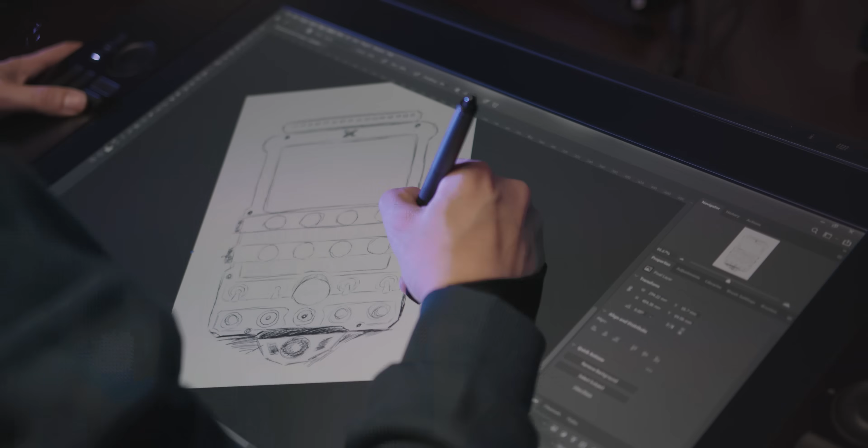In this project, I will show you how this button box went from quick sketch on paper to something real that actually can be used for simulation. The idea was simple, you only use what you need. Everything connects with a magnet, so different modules can be added or removed easily.

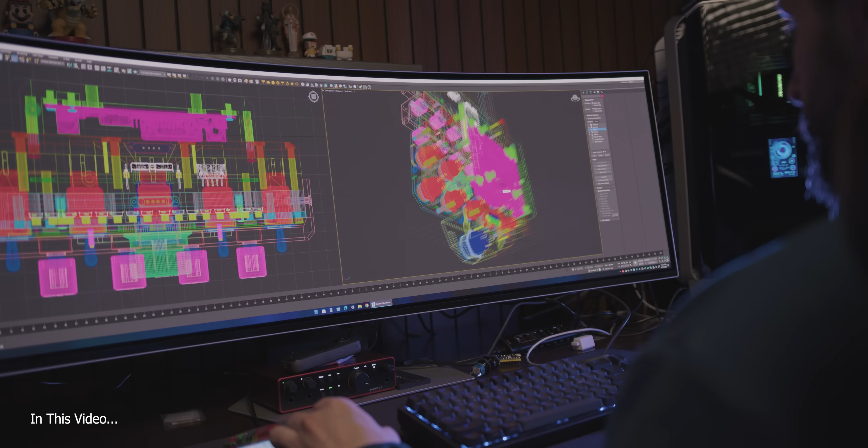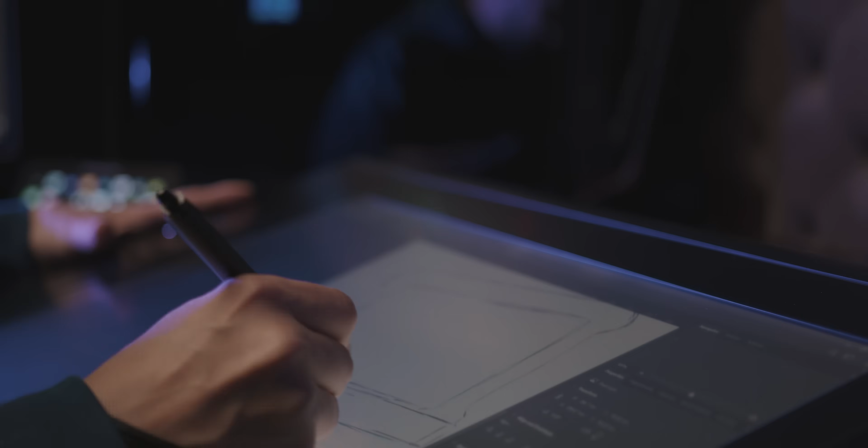I came across this upcoming button box by accident, and it instantly gave me an idea, why not create my own with my own vision. So I opened Photoshop and started drawing, letting the shapes come naturally without overthinking it too much. At this stage, it's really about defining the overall look and getting a real feel of how everything fits together. It's also much easier to make changes here compared to working directly in 3D.

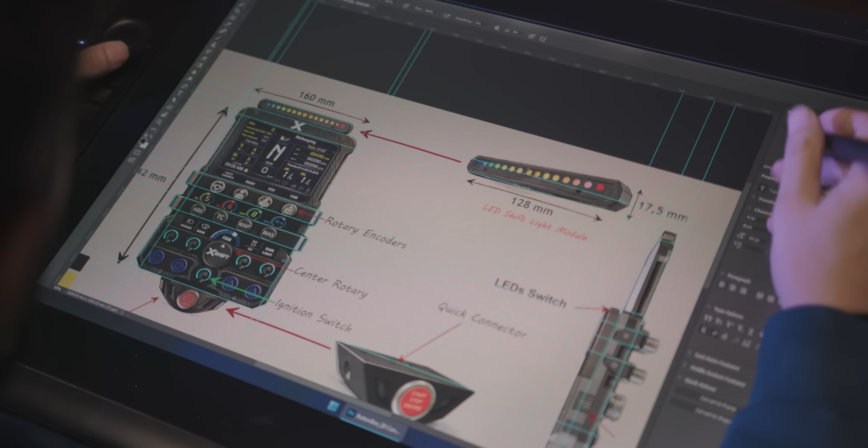Once the main idea feels right, I start adding some colors and basic textures, just to get a quick preview of how the final design could look. This helps me validate the direction before moving into the 3D modeling phase.

Once the design was clear, I moved into 3ds Max to start building the 3D model. I used the sketches as a guide to define the overall shape of the button box. From there, I started taking precise measurements of the main components, like the display and the other hardware.

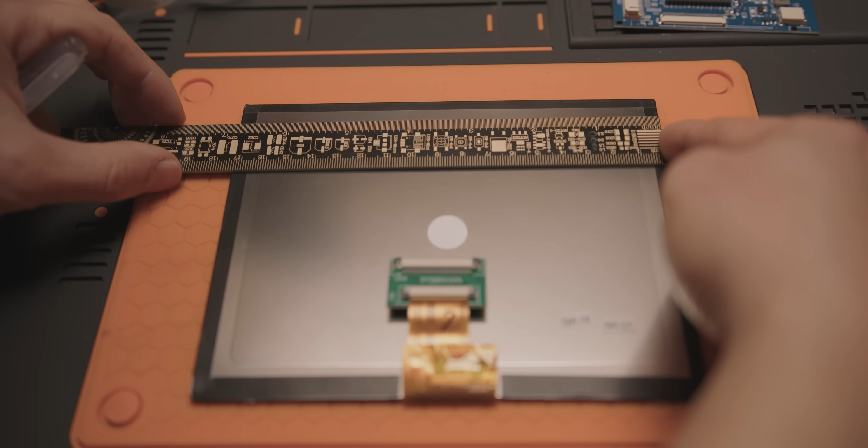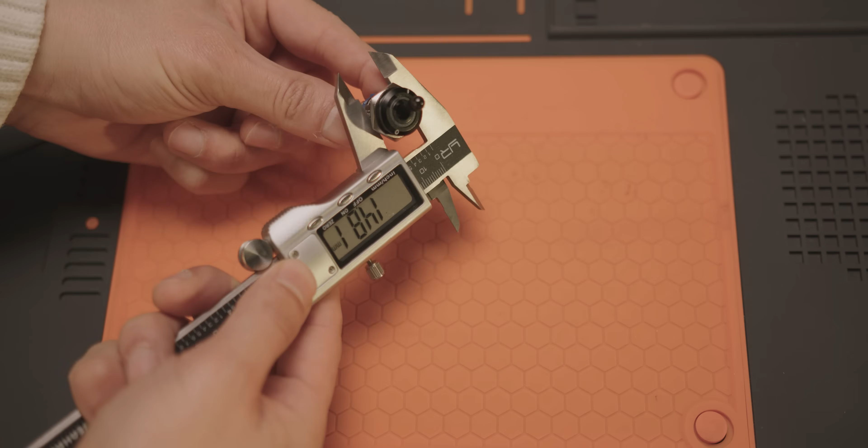For the buttons and switches, I used these 12-volt high-quality LED buttons for this project and measured them with a caliper to make sure everything fits correctly. This allowed me to build an accurate 3D model and get a clear preview of how everything would come together.

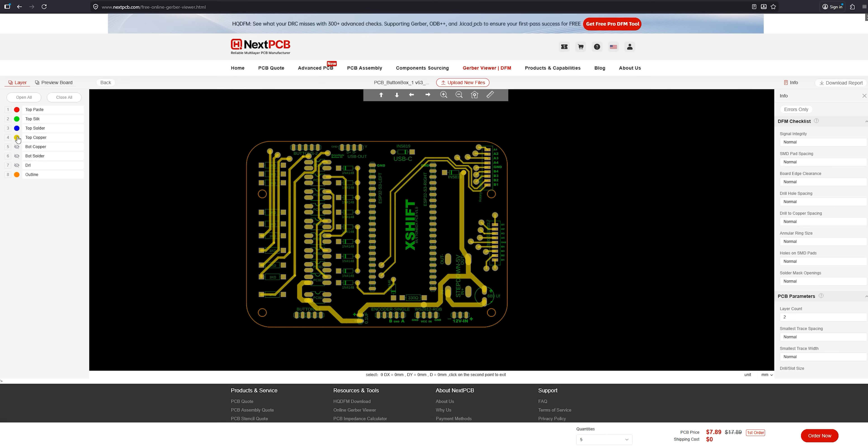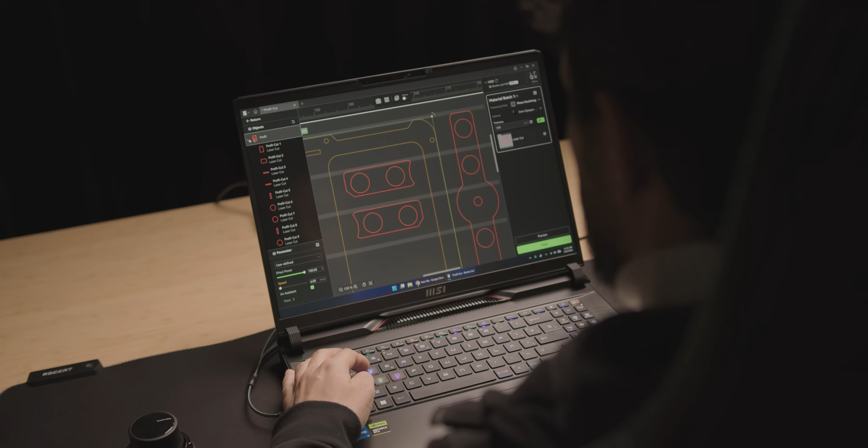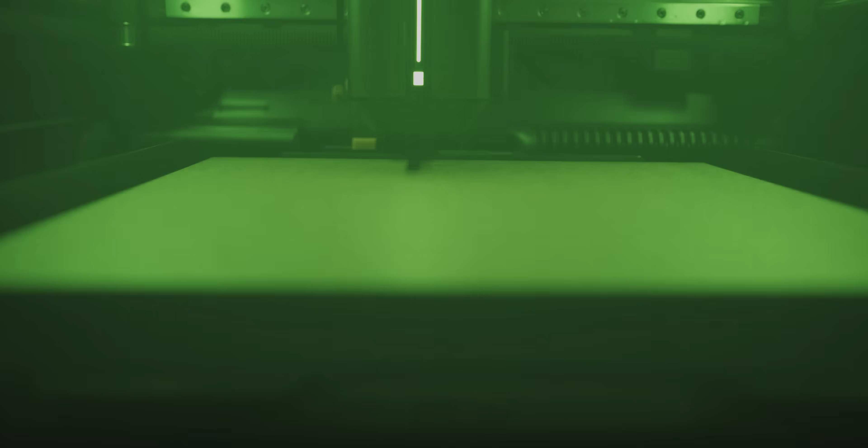For the front plate, I wanted the carbon fiber look, so I started by cutting acrylic sheet using the laser on the H2D, which I later covered with carbon fiber vinyl. Since this was my first time cutting black acrylic with a diode laser like the one on the H2D, I tried different methods and settings, even cutting with the protection film on, but this actually gave me the worst result.

For comparison, this part was cut with a diode laser and this one with a basic CO2 laser, and the difference is just pretty clear. The CO2 cut gives much cleaner edges and more precise results.

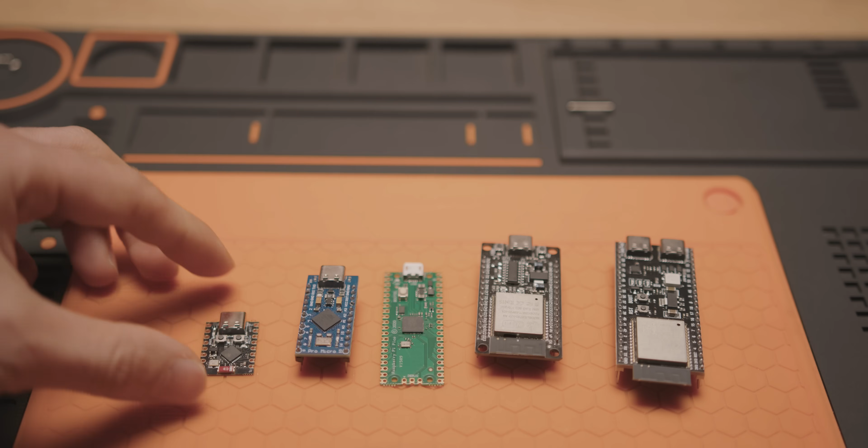For the brain of this project, I considered a few different options, each with its own advantages and limitations, but in the end, I went with the ESP32-S3, since it can handle all the components without the need for any extra expansion. To power the system, I added the necessary components including a step-down converter, a couple of capacitors and a diode. This gives me a second power option, especially useful if I decide to run the system over Bluetooth.

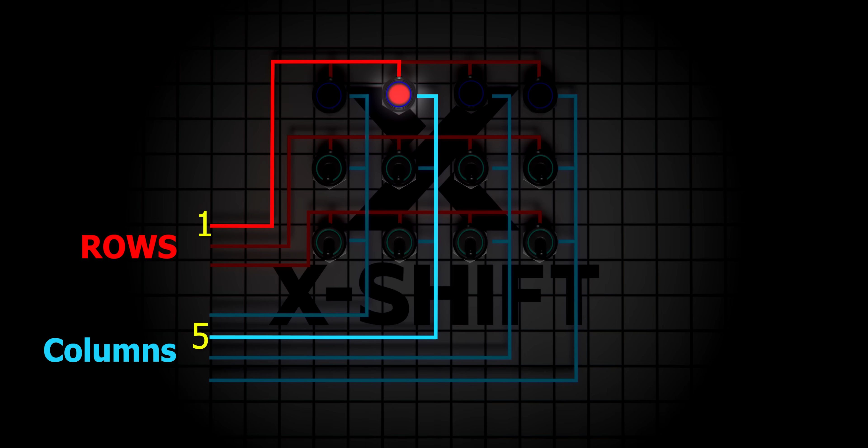To connect all the buttons and switches while using fewer pins on the microcontroller, I used what's called a matrix layout. Instead of running 2 wires to every single button, the buttons are arranged in rows and columns. Each button sits in the intersection between a row and a column. The microcontroller scans the matrix by activating one row at a time and reading the columns to detect which button is being pressed. In this setup, I can wire 12 buttons using just 7 pins, which makes it a really efficient way to handle multiple inputs.

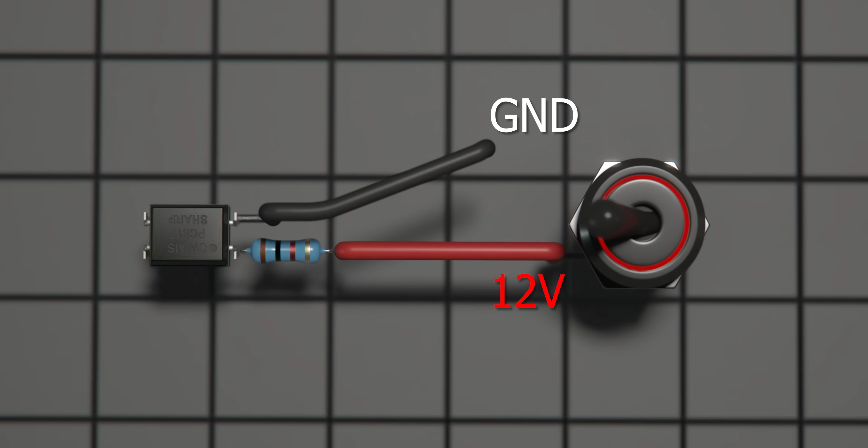Using a matrix layout comes with some limitations, and one of the main issues is noise and unwanted signals. To safely use these 12-volt LED buttons, I added optocouplers to isolate the 2 different voltage levels. Each optocoupler is paired with a diode to keep the signals clean and avoid interference in the matrix. On the input side, the button sends 12 volts through a resistor into the optocoupler. When the button is pressed, it simply activates the internal LED inside the optocoupler, which then transfers the signal safely to the microcontroller.

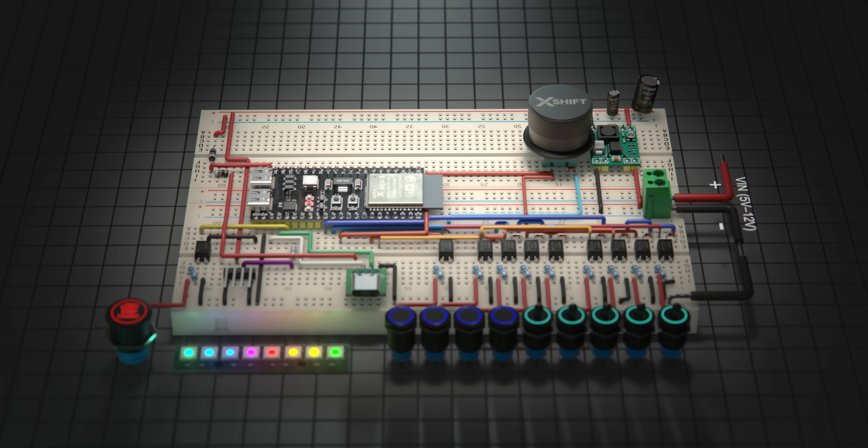The rest of the components, like the detachable button module and the RPM lights, are connected separately using their own dedicated pins. The rotary encoders are connected directly to the microcontroller, each one using its own set of pins to keep the signal clean and responsive.

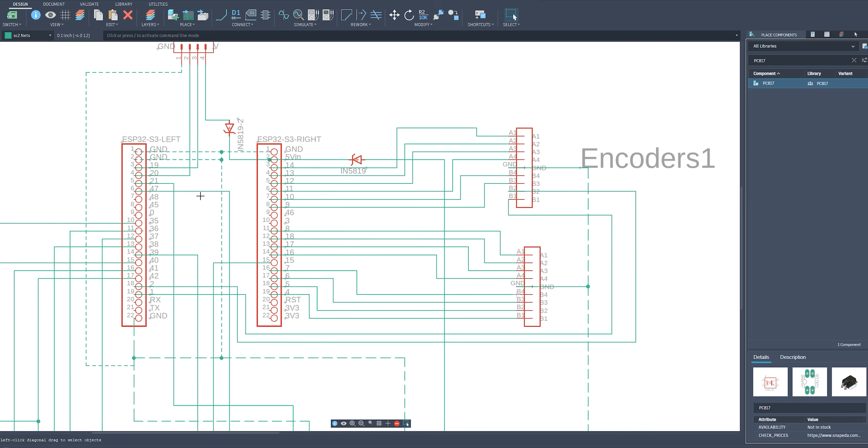After testing all the components on the breadboard and making sure everything was working correctly, I moved on to recreating the same layout as a proper PCB inside Fusion 360. Once the wiring was finalized, I started routing the PCB. I personally prefer doing all traces manually instead of using auto-routing, since it gives me much better control over path spacing and overall layout.

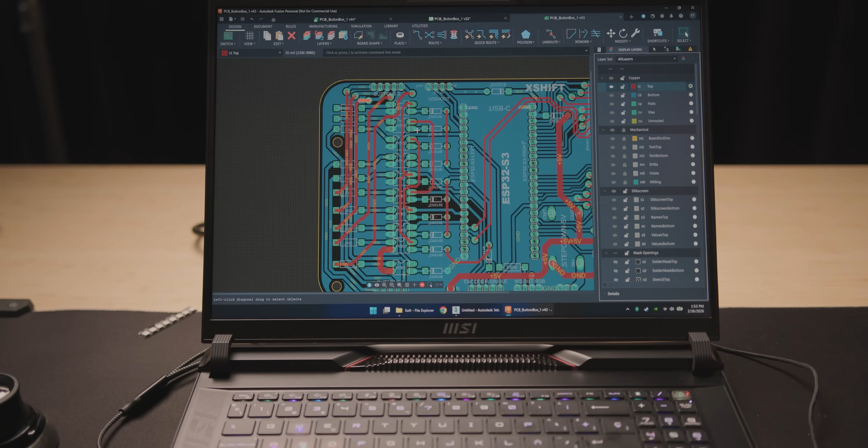For the ground, I use a full copper pour on the bottom layer, basically creating a ground plane to keep things cleaner and improve stability. And finally, doing a last check on all traces can save a lot of time before starting the PCB manufacturing.

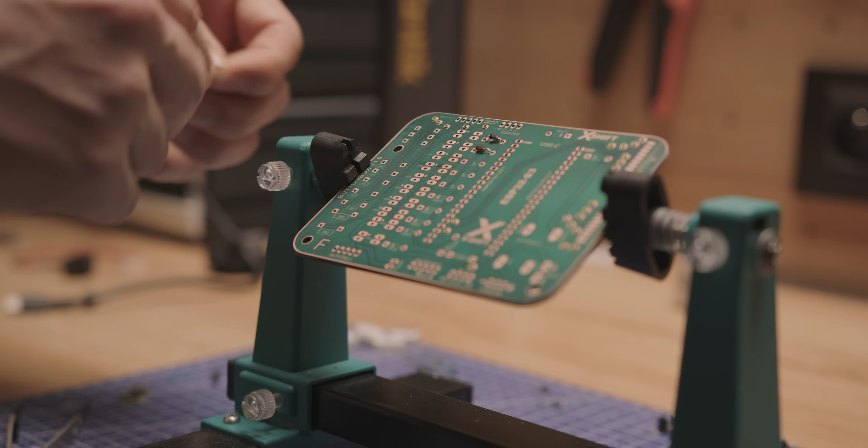Once the PCB was assembled, I connected the microcontroller and finalized the code along with the matrix layout, this time testing everything directly on the PCB. I also added momentary behavior for the switches directly in the code, so they act like a quick press instead of staying on. I used the software called DIView to test all the buttons' inputs, making sure every press was detected correctly, and also to check for any ghosting or flickering in the matrix.

For the graphics on the LCD, I designed the full layout in Photoshop, then imported everything into SimHub. Using JavaScript expressions, I linked the 2D design to the live telemetry from the game, so everything becomes dynamic and updates in real time during the race.